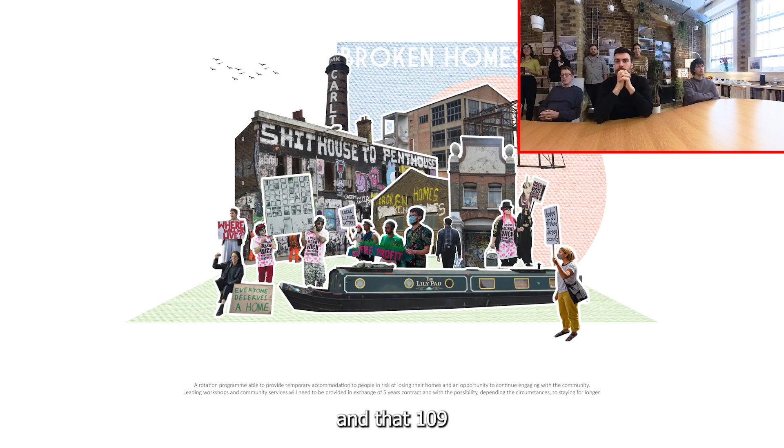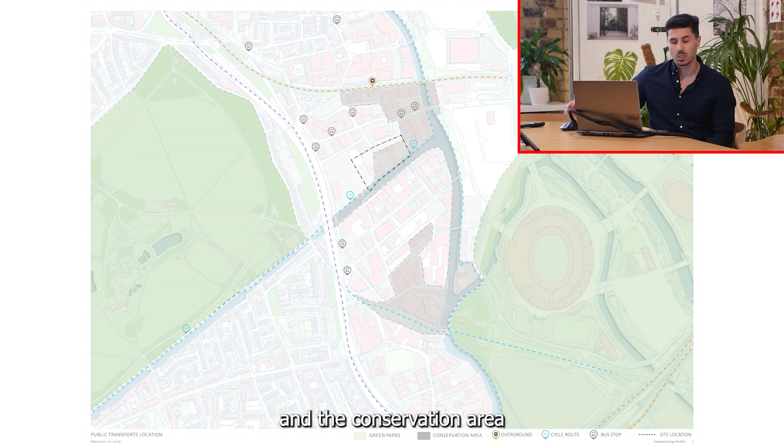So basically this was a fourth year portfolio. I think it's got like 70 pages, and the fifth was 109, so I think this one might be better to just run through it all, try to do it quickly, and try to remember everything from the project.

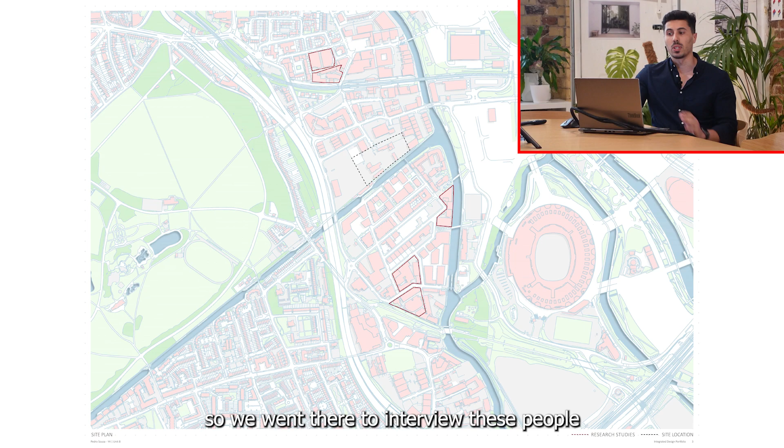But it was basically based in Hackney Wick, so the site is over here, and I'm just showing basically the connections and public transports, green parks, and the conservation area.

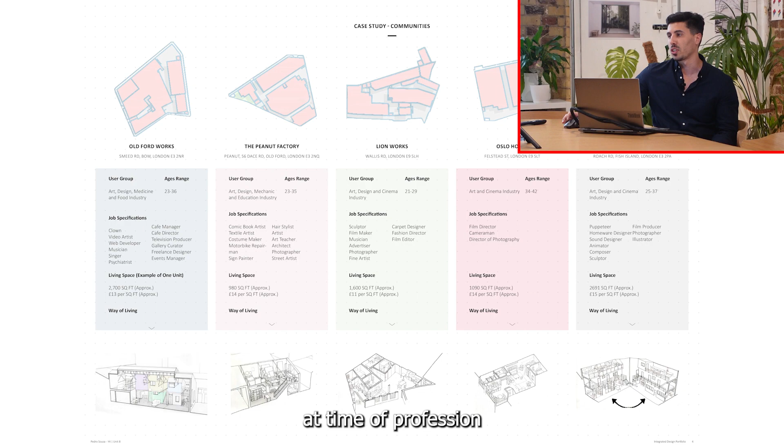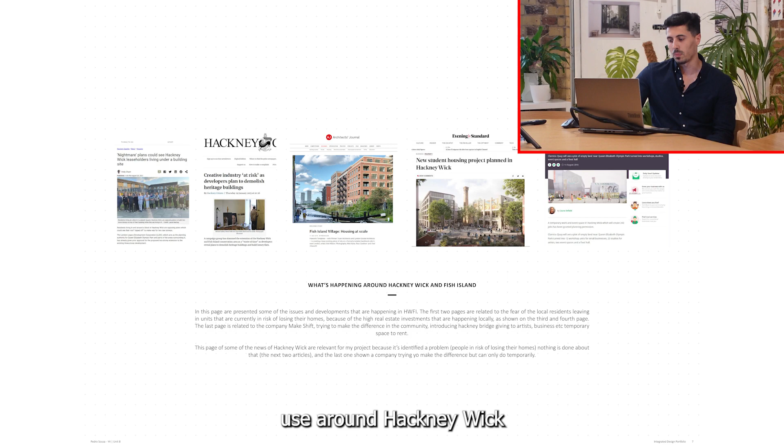And then we also did a case study around, so these places were basically where we went on site and interviewed the people, the users over there. And just to give a perspective, this was based, there's warehouses and temporary or really bad residential properties there. So the council wants to demolish it and build new flats, so we went there to interview because people are at risk of having to leave.

So we have the sites on the top, and basically the user group who are living there, the type of profession and the age gap as well, and a slight sketch of what these spaces look like.

Some interior photographs of how these users were living, and Hackney Wick is more like an artistic place, so this is really just photographers, artists, and just within that industry.

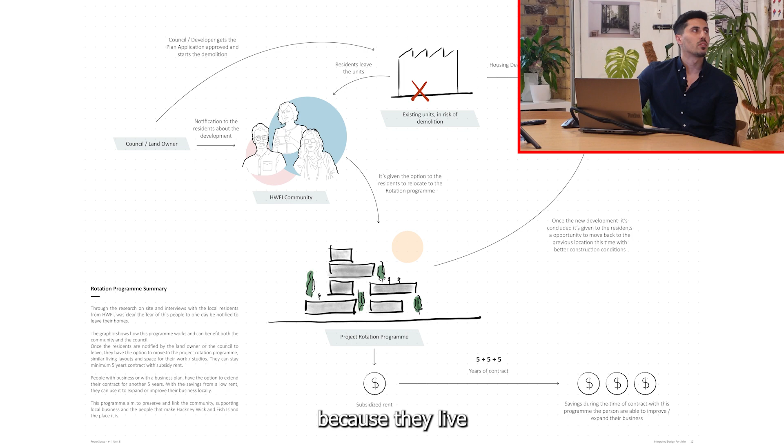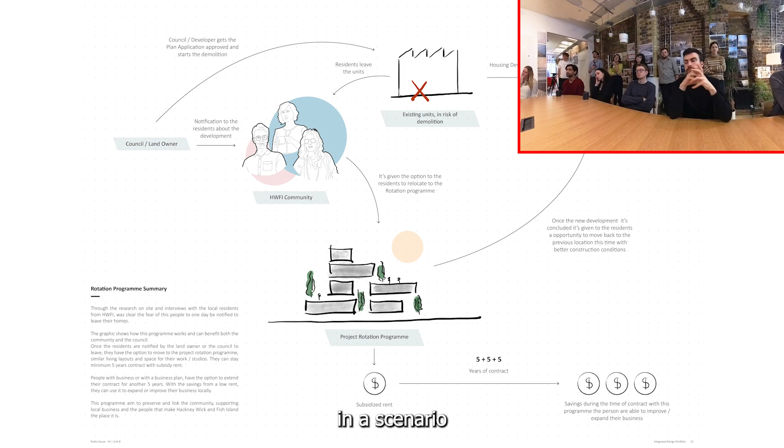Just outside of some sites used around Hackney Wick. And then this is some highlights of the site, there were risks of demolition of housing for development.

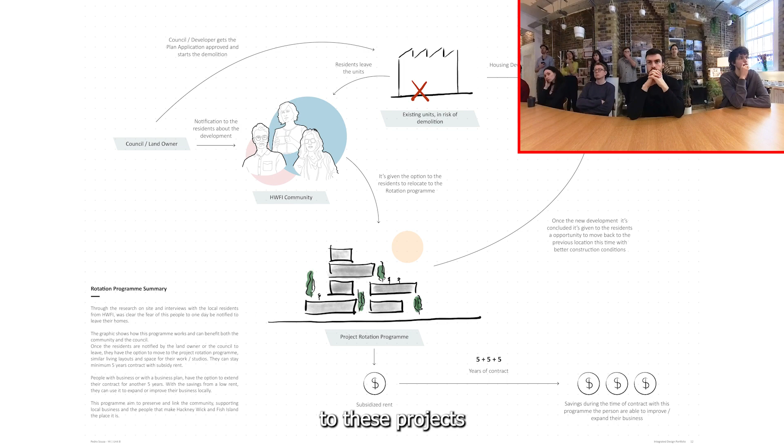Some users that we had feedback from and what they say about living there, what it represents for them. So then the program starts, how the relationship with the client and the project itself.

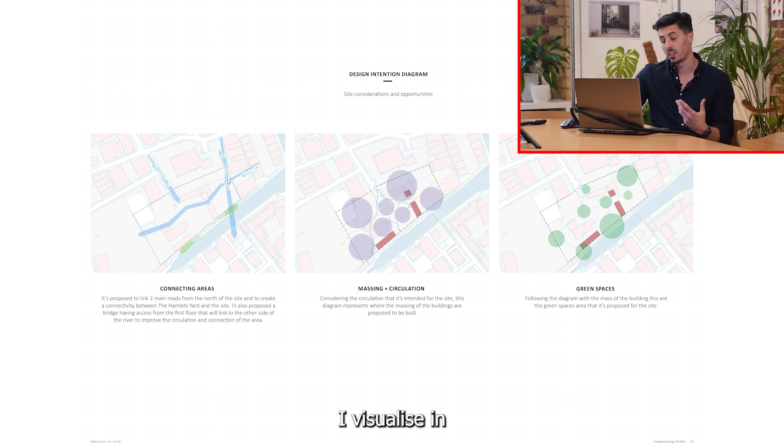And so the idea was, because they live in a particular way, I think it was beneficial to create a project where it matches the way they live, and it could work in a scenario where, okay, it's going to be demolished.

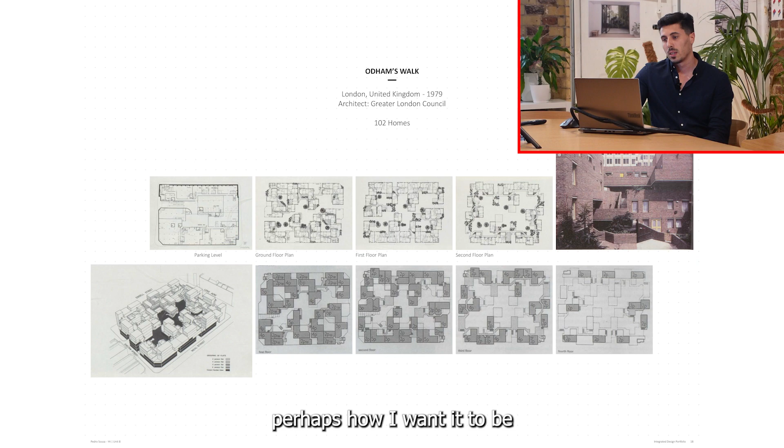If it's going to create a new development of housing, then they can perhaps move temporarily to this project, or the one I'm creating, and then perhaps if they want to leave for a new development, it's up to them, or if they want to stay on this one.

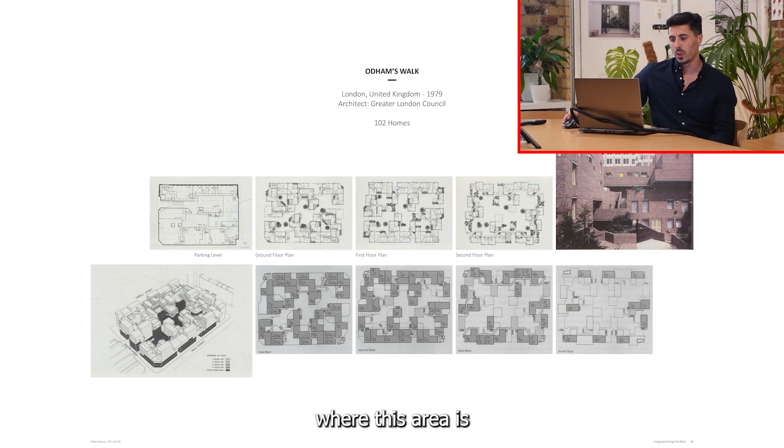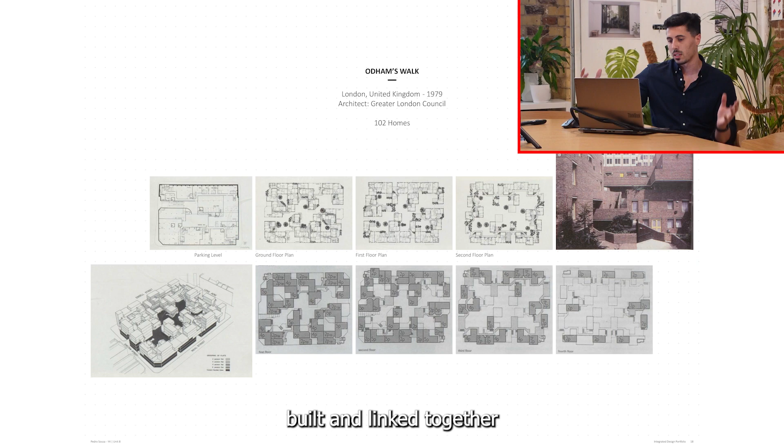Perhaps some other ideas of retaining the brick from the demolition that I want to use for some flooding solutions.

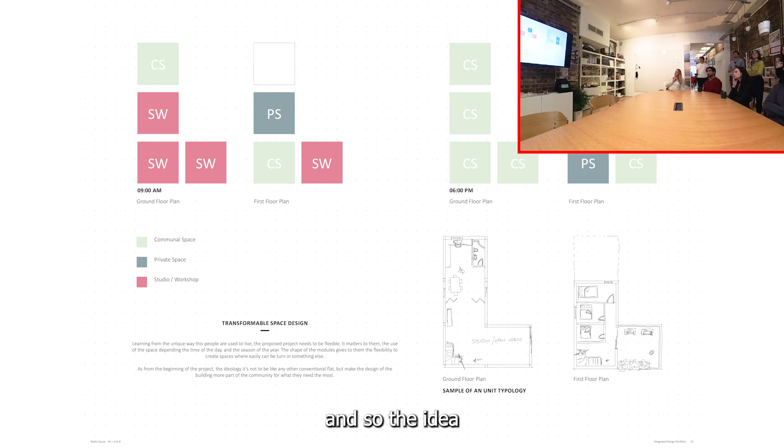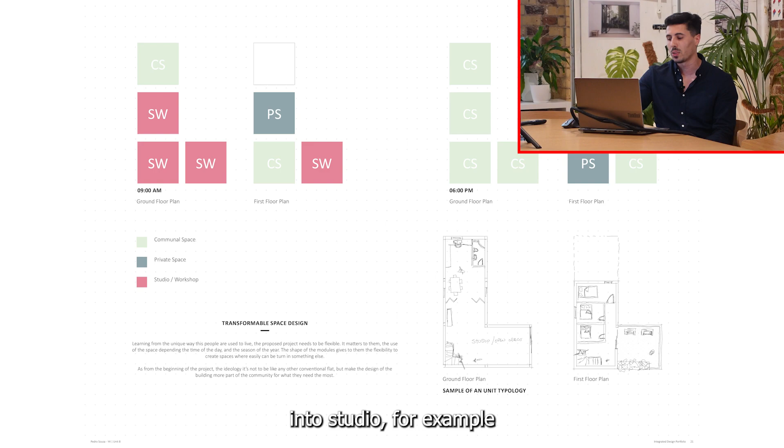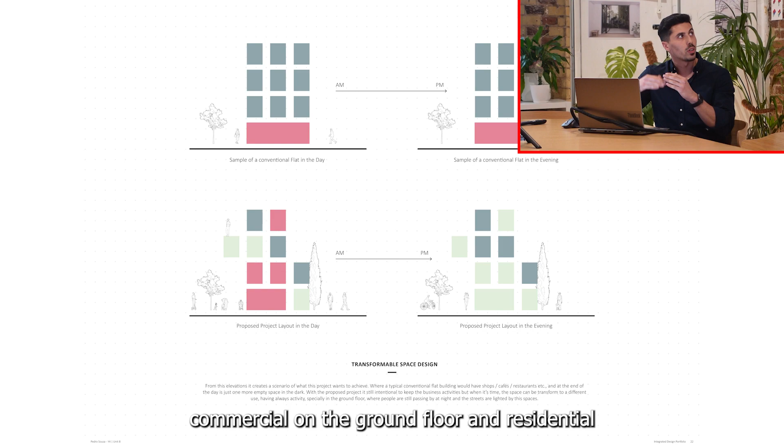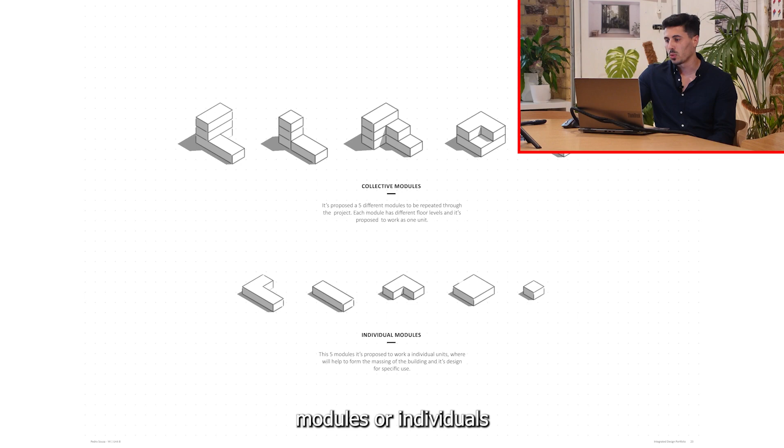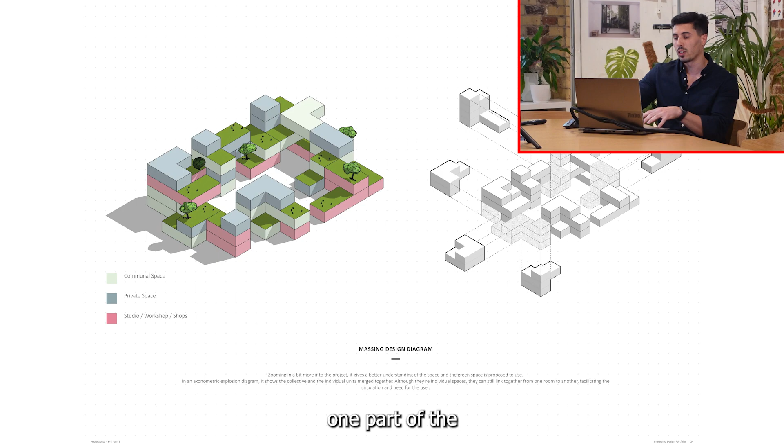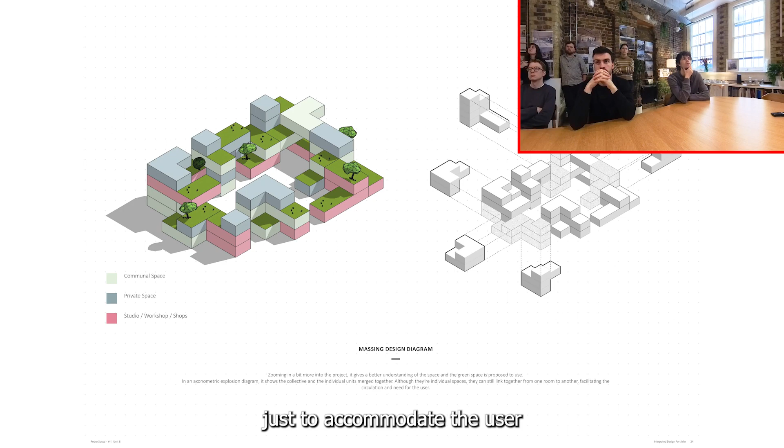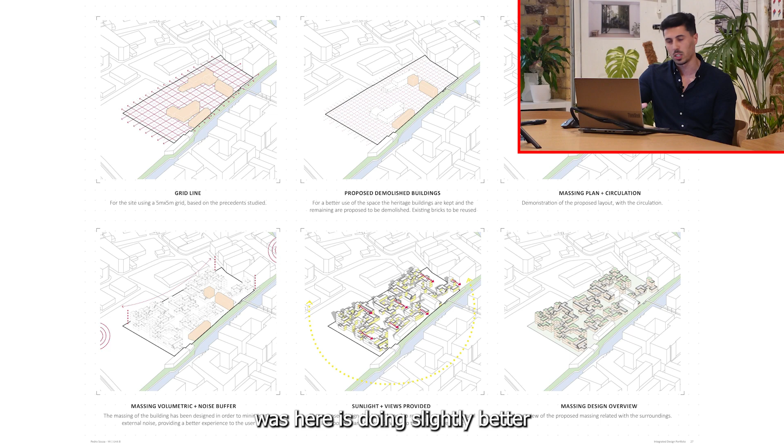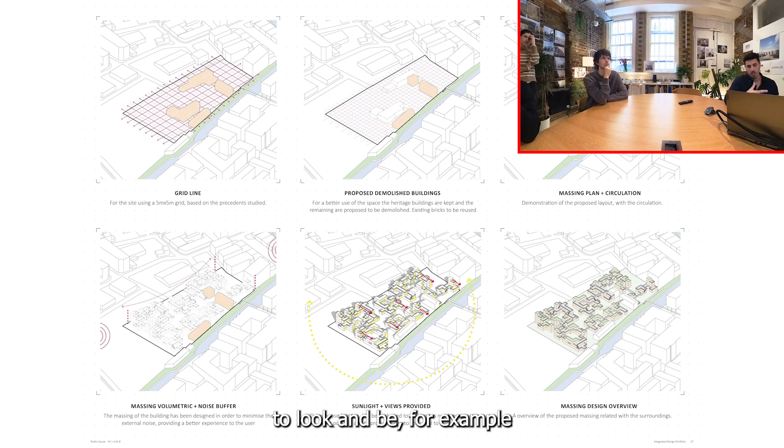And so the idea was, especially that I wanted to preserve the way they were living currently. So I wanted to create a flexible space where the living room is not just the living room, it could be created into a different space, as a studio, for example.

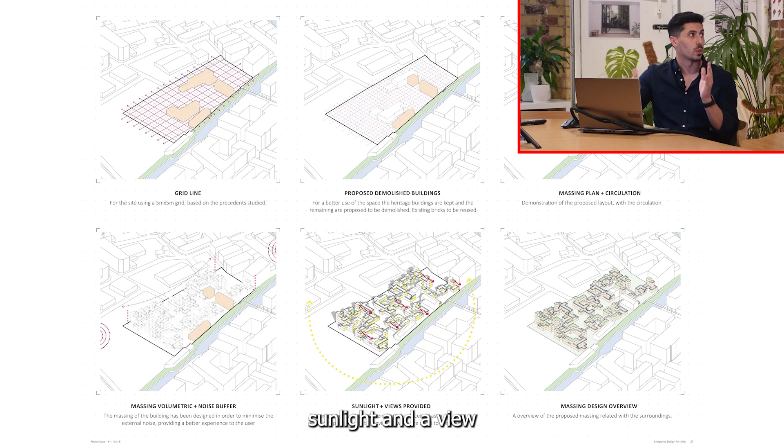And then this reflects on the typology or the design itself, where instead of having a conventional flat where it's commercial on the ground floor and residential on the top, there's a different variety of flexibility within each floor.

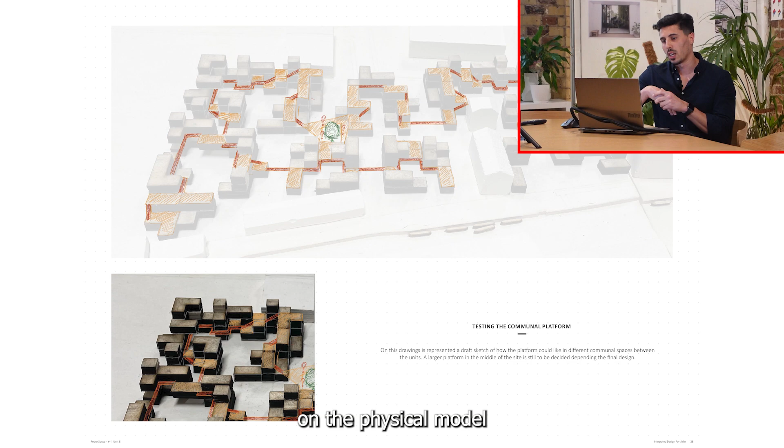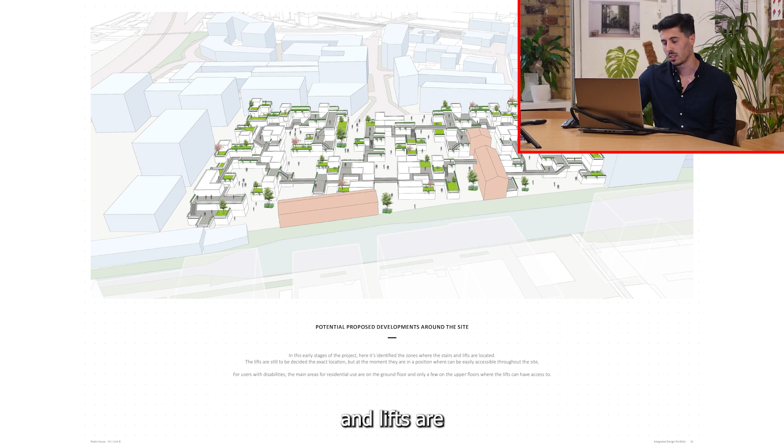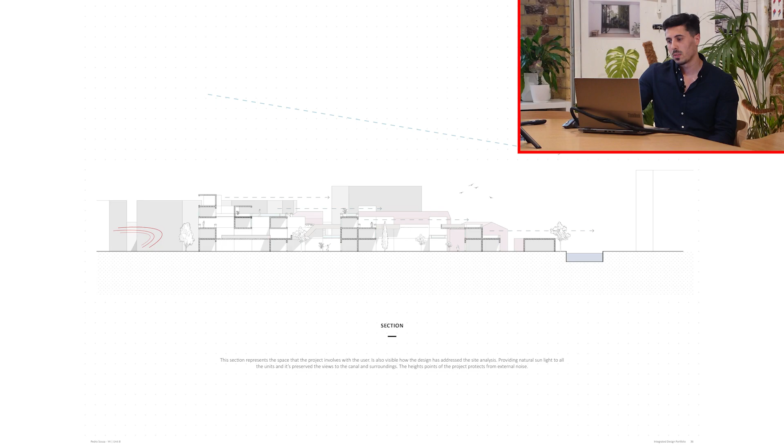Some ideas of collective modules or individuals I tend to do for the project itself. You can see how they are linked - for example here's one part of the project that creates a yard, and we can see this could be one flat, this could be another flat, so there's different types of layouts just to accommodate the user. It's like a link between the Adams Walk and Habitat 67 as well.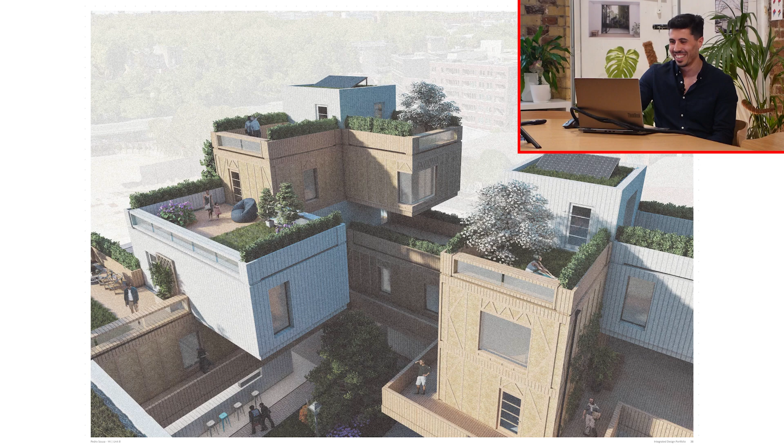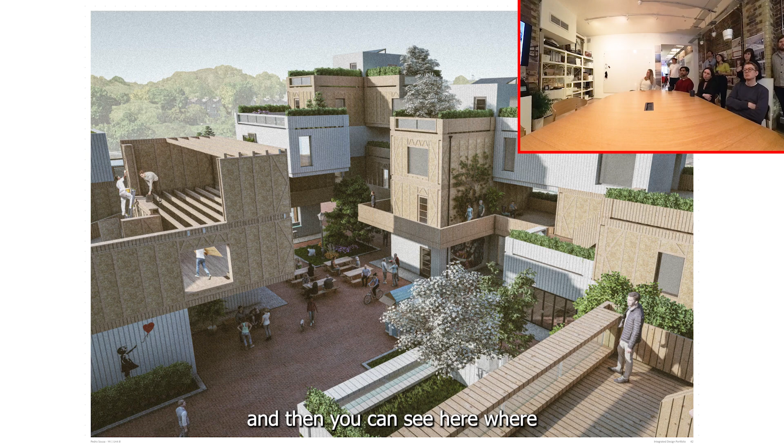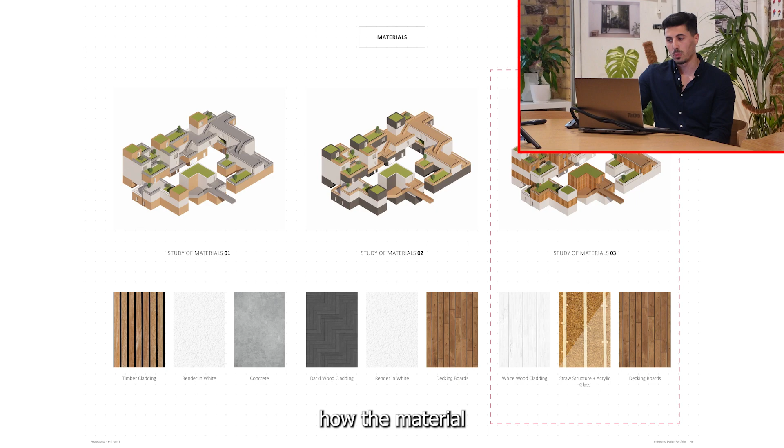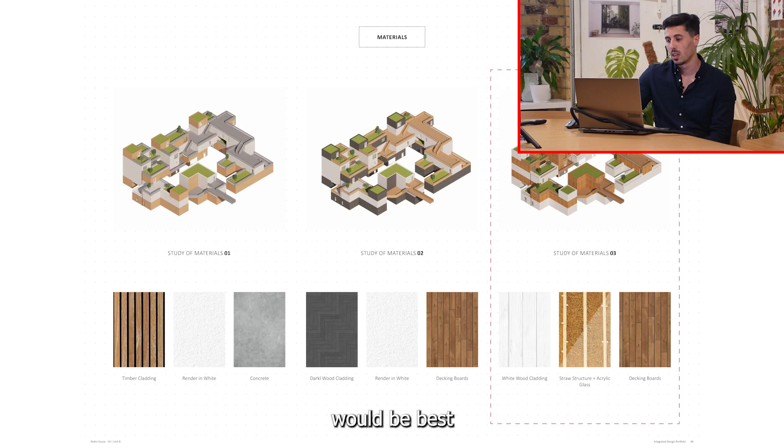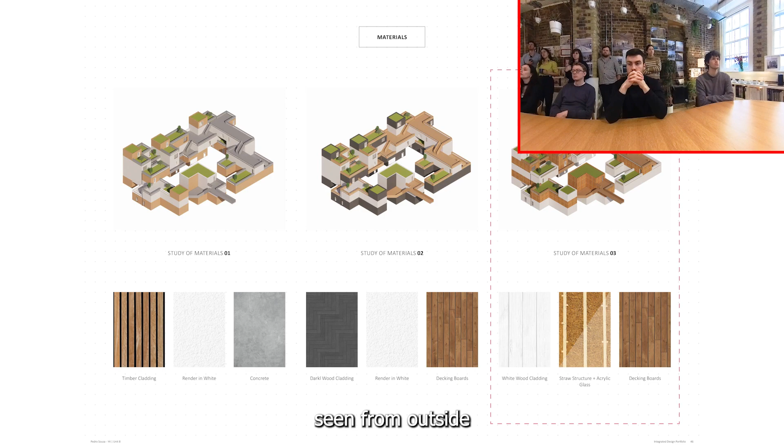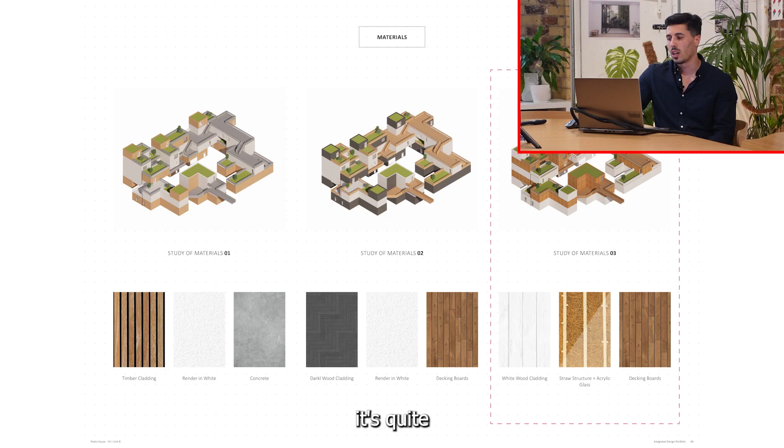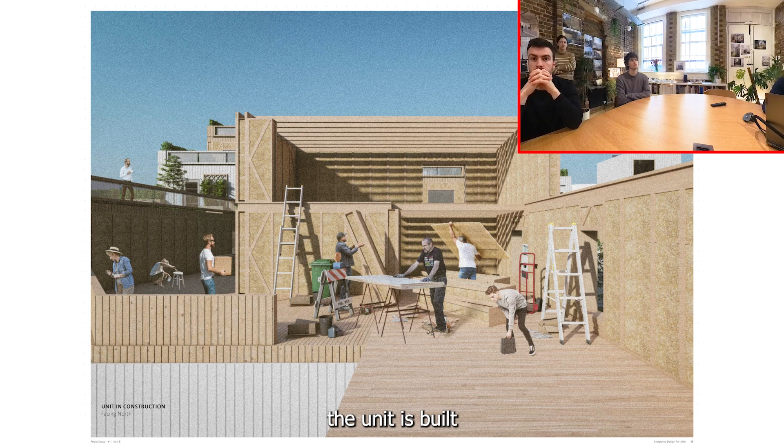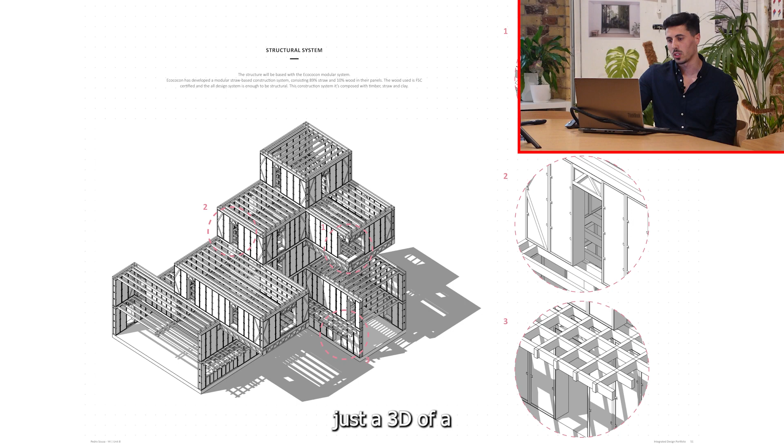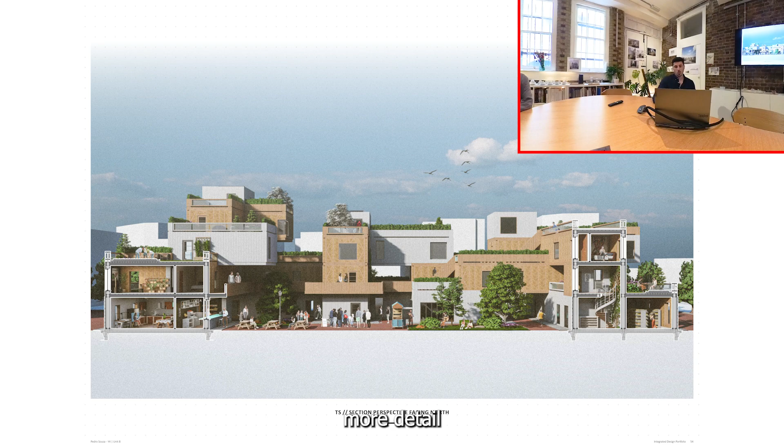One of the ideas as well is that the units could be self-built, perhaps by the users. Just a rooftop, and then part here is part of the circulation, the space, and the public space as well as circulation - how the material was used.

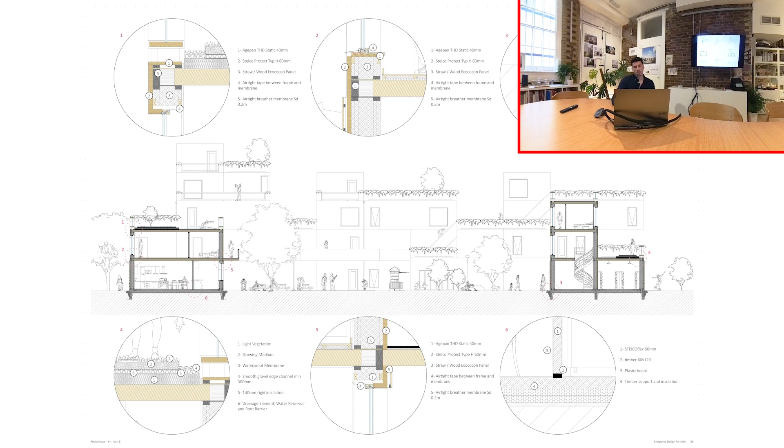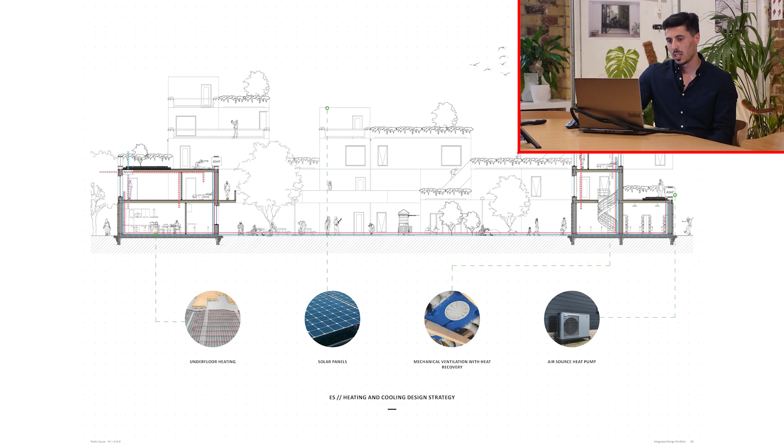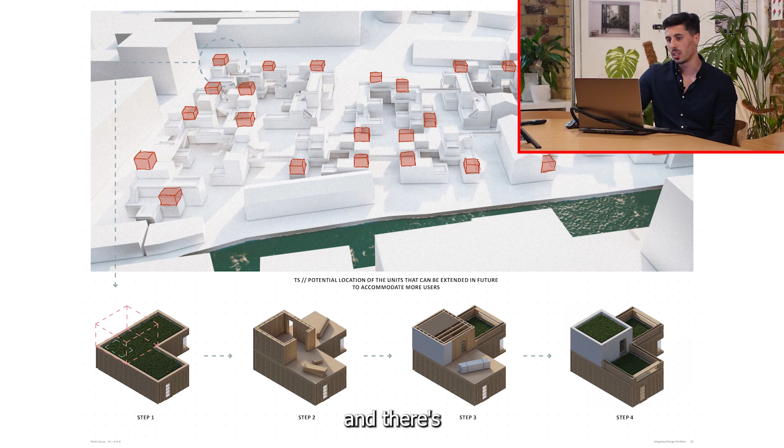I was trying to see what others like, what type of materials would be best. So at the end I used this one where it would probably be interesting to have the structure seen from outside. I'll explain more in a few pages - the structure is condensed straw, and it's certified by passive house as well. It's quite interesting the way they do it, and it's also part of the structure.

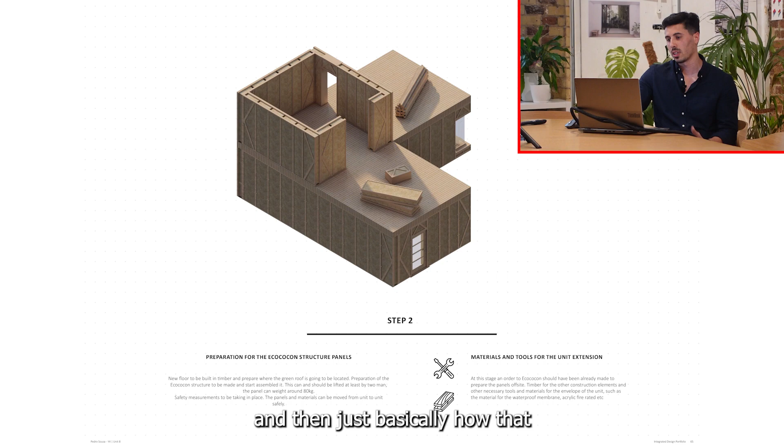It's just an idea of how the unit is built - the physical model, kind of like a naked unit. Just some photos of it, a 3D of it, and more specifically the U values, thermal conductivity, etc. of this structure.

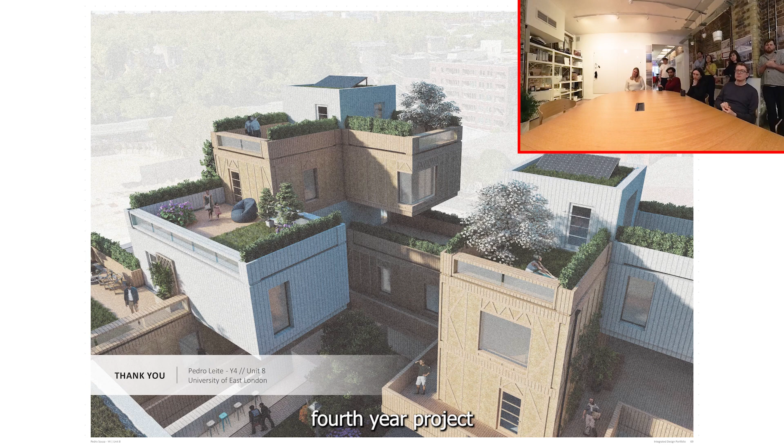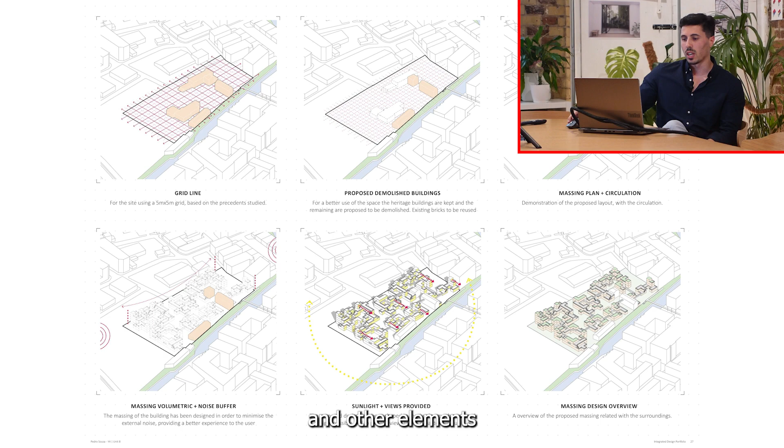Some case studies that have already been used, and then a more detailed section and close up of how it's built - just technical drawings of how it works in terms of how it reflects with the sun position at different times of the year.

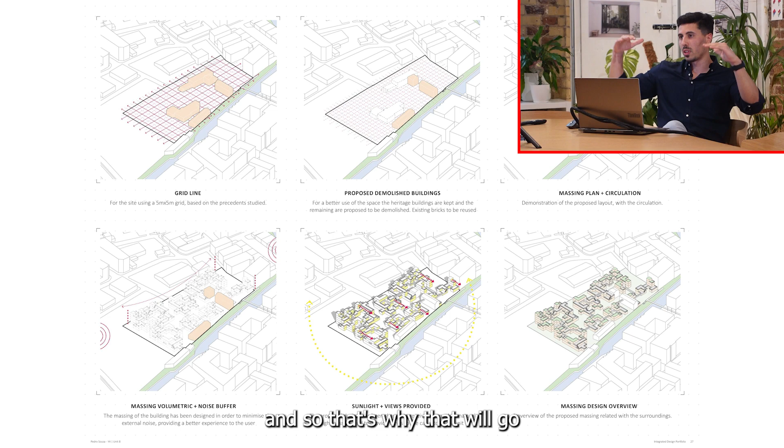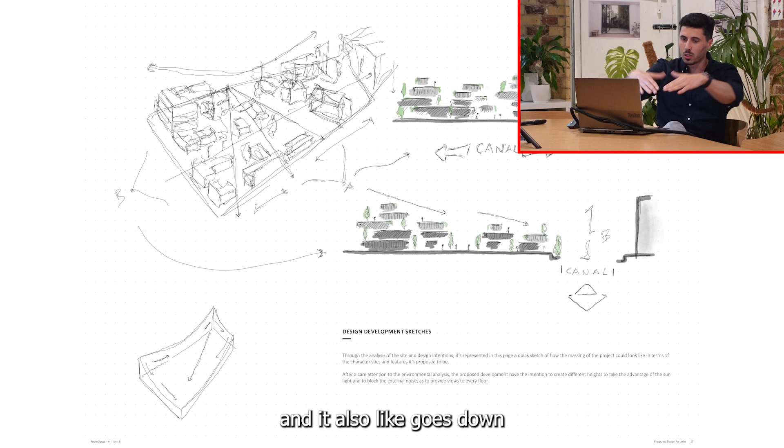The heating and cooling design strategy being used, the water system, and the fire strategy at the end. There's part of the development that still has room for improvement or room to extend if needed, and basically how that will work. And then that's pretty much it.

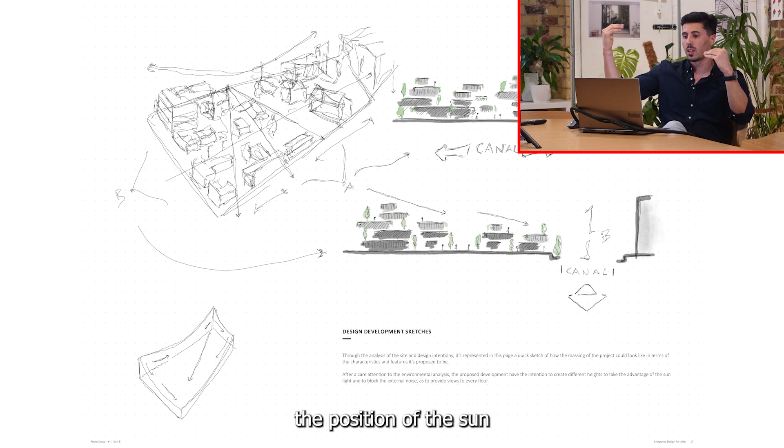Thank you. I probably missed a lot, but if you guys have any questions.

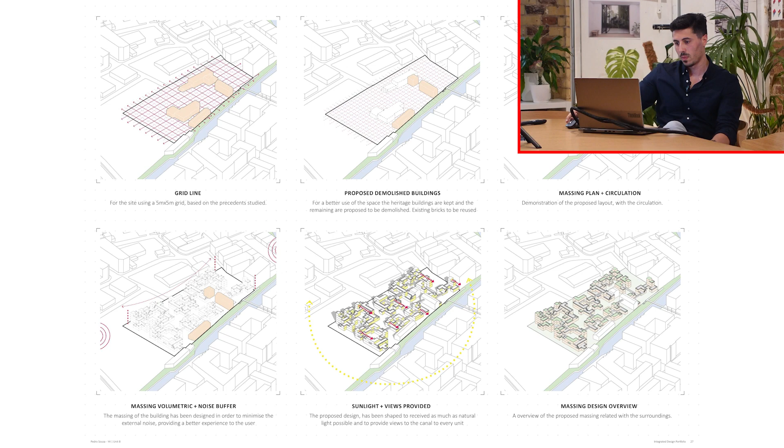Where did you study, Pedro? University of East London. Cool. Yeah, this was a fourth year project.

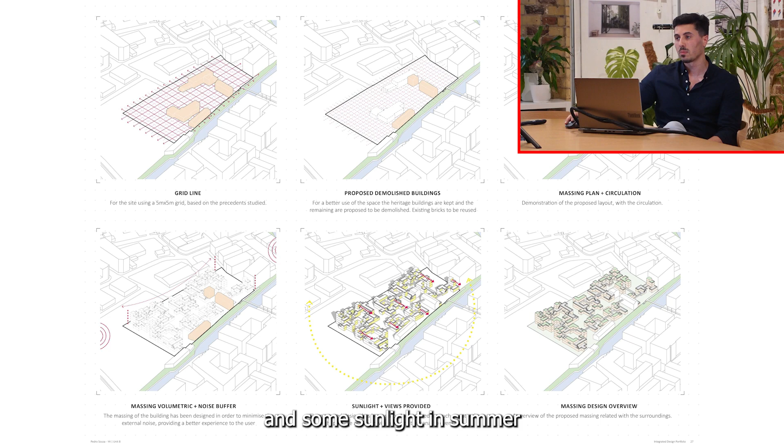How did you decide the orientation of the units and how they all stack together? That's a good point - part of it was from the site analysis. Because of the noise buffer and other elements, I wanted the top unit to create like a shield for the noise, so on the sketch you might see the top ones will be more in the corners, and then it kind of goes down. This gives all the other tops of the units sunlight because of the position of the sun, and most of them will also have a view of the canal.

Yeah, but it's from here, because all these ones are low or on the ground, which is the first floor, so all the others above still can have views and some natural sunlight. Yeah, cool.